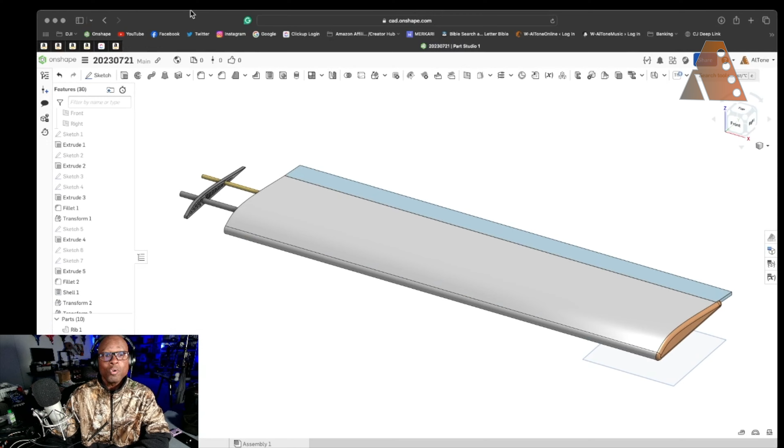So if we go over to the computer screen here and jump into Onshape, essentially I started designing this plane from the wing.

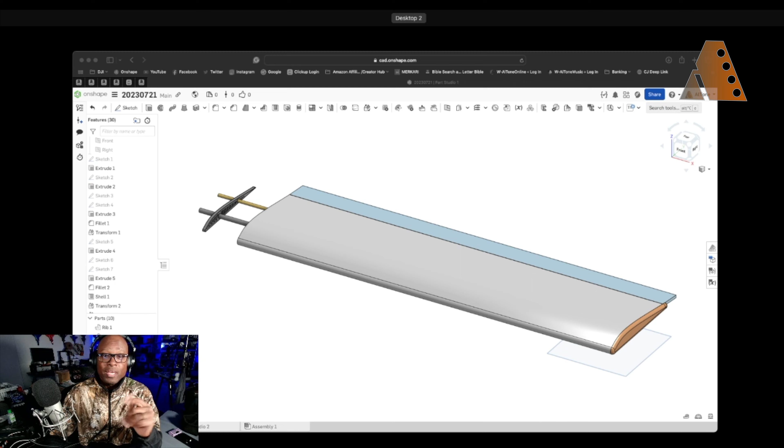The reason I started with the wing is because I have a plan that was provided to me for a trainer, the trainer I actually learned to fly on, from our club president. He designed it for the club as the club trainer, and I thought it was awesome, so I was trying to build something like it. Essentially, the wingspan on this guy is basically the same.

So this is basically what the club plane plans look like, and he had some dimensions in here for the wing. I took that information and started working on my own design for the wing, which is what you see here.

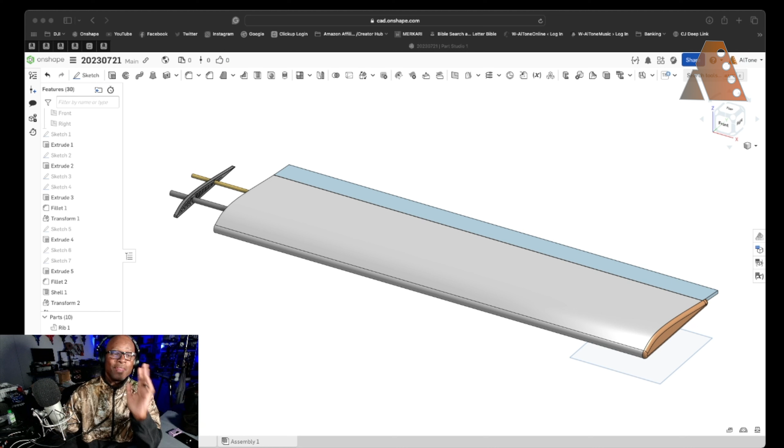Now this wing, if I take off the foam board skin, and that's what I'm doing here in Onshape, like I said, I designed it myself. These ribs I designed and 3D printed, and each one is about 5 millimeters thick. I've 3D printed a ton of these.

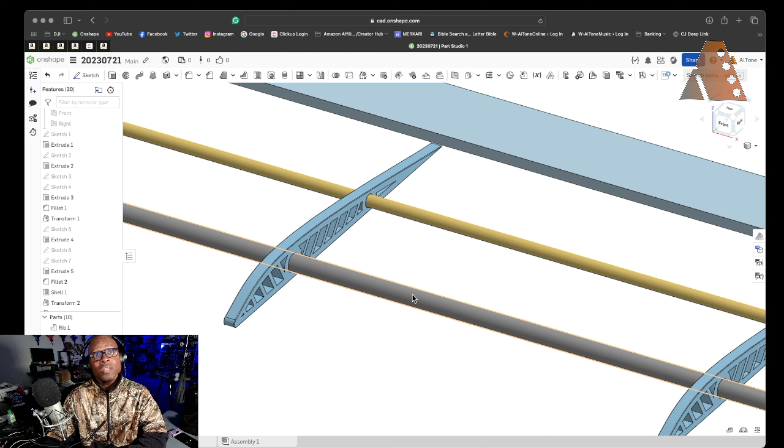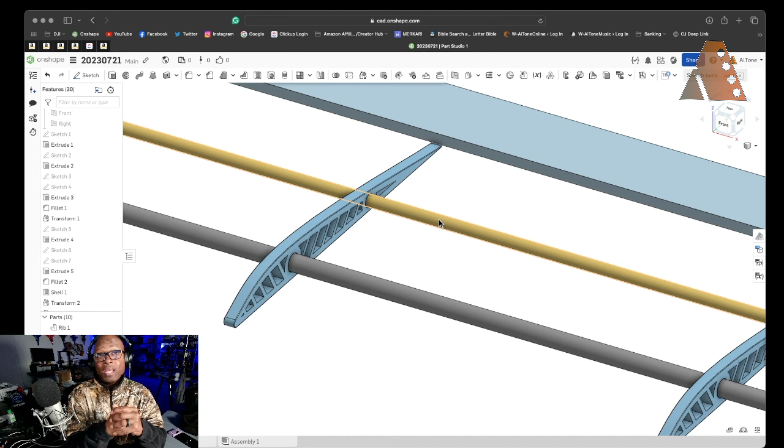And then this is the carbon fiber rod that runs through it, basically a Walmart bow and arrow rod that I chopped the ends off of. Each side of my wing is 28 inches. This is basically an extremely long craft barbecue skewer, long enough to give me over 28 inches, and I chopped the ends off of that as well, and used that to design the wing.

So my wing is actually relatively heavy. Now I made a tip that I was going to 3D print for the wing, but I actually did not do that. I just covered it with foam to save a little bit of weight, and then I took the same interior. So my wing does not have dihedral, and I extended it.

I want to say it's extended, it's probably 50 millimeters wide, and then I took out some material to make it lighter, and then that serves as a joiner. The ribs actually slide into that. So this wing is reinforced all the way down, which of course adds just a little bit of weight.

So in the process of trying to figure out how to do the fuselage and all that, I decided to go right now with a tube fuselage from the Experimental Airlines channel, and that's what my plane currently looks like.

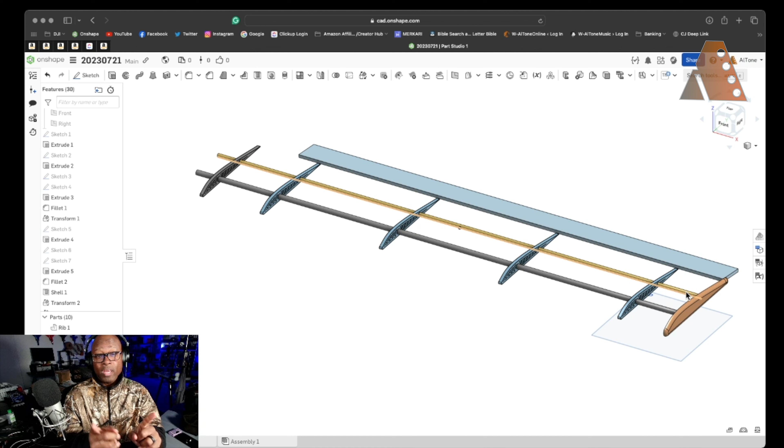I'm going to be working on it, and the tail is relatively long and whatnot. I'm going to be working on putting landing gear on it. Right now, I'm estimating this plane to be around 2,000 grams, which is a little bit over 4.5 pounds total, and that's all-up weight with the battery included, everything complete.

So that's what I'm estimating, essentially that's my budget for weight: 2,000 grams, or 4 to 4.5, a little bit over 4.5 pounds.

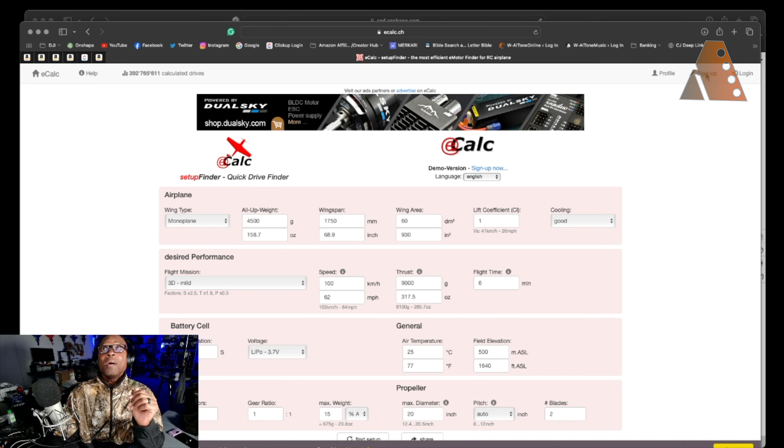And so with that information, you can use a tool like this, which is eCalc, and I actually have a membership for it. You can use it for free, but if you want, you get a few additional things and tweaks if you get the full version. But I have signed up for the subscription myself.

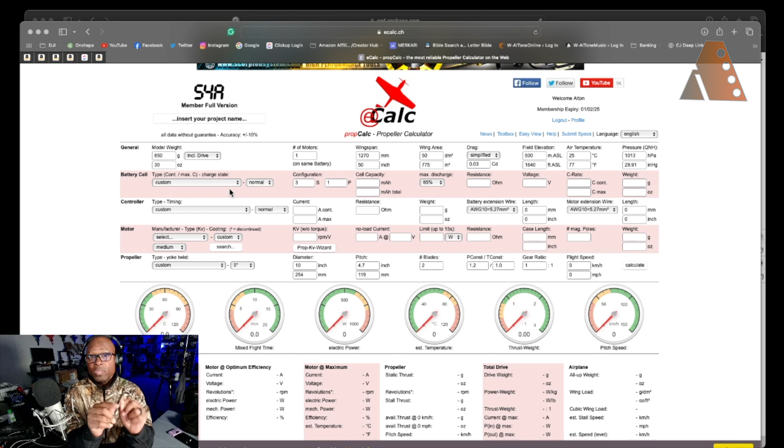This is a phenomenal tool, but it's got a lot of information in it, and I had no idea how to use that information. So I wanted to share this tool with you today. I apologize, it's taking me a little bit to get to it, but I wanted to share this with you. You can go to it yourself and check it out. I don't know who actually put this together, but it's just awesome.

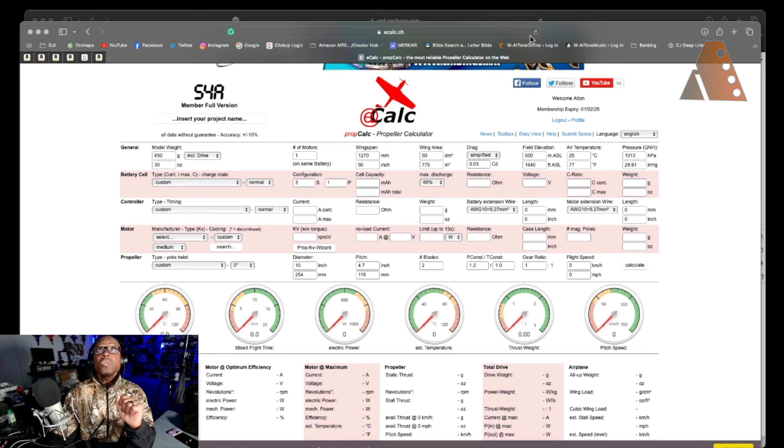It gives you so much information, and I'm going to demonstrate it a little bit for you using something that we already know, which is the FT Tutor.

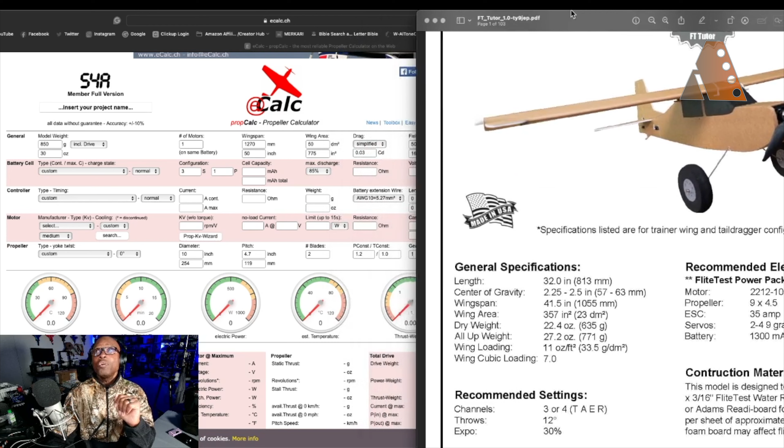So for the FT Tutor, if you get the plans, which I have, and of course I have a tutor that I fly, I thought I don't totally understand how to use eCalc to come up with the design I want. So what's the best way to figure out how to do something? Reverse engineering. That's exactly what I did. I took the general specifications, sat there looking at the plans, and realized they had much of what was necessary for me to put together a plane and fly it. They have so much of what I need, so if you want the information, it's right there.

So you've got your wingspan, wing area, and what you can do is enter the model weight, your general weight in grams. Your all-up weight is 771 grams. So if you want to figure out how this works, we're going to plug in the information real quick so you can take a look and see what it does. It actually converts the grams to ounces for you, and converts between the two.

If you know inches, put your inches in. If you know millimeters, put millimeters in. So our length, the wingspan we're looking for, is 41.5 inches. If we put 41.5 in here, it gives us 1054.1. They have 1055, so they've rounded up just a little bit.

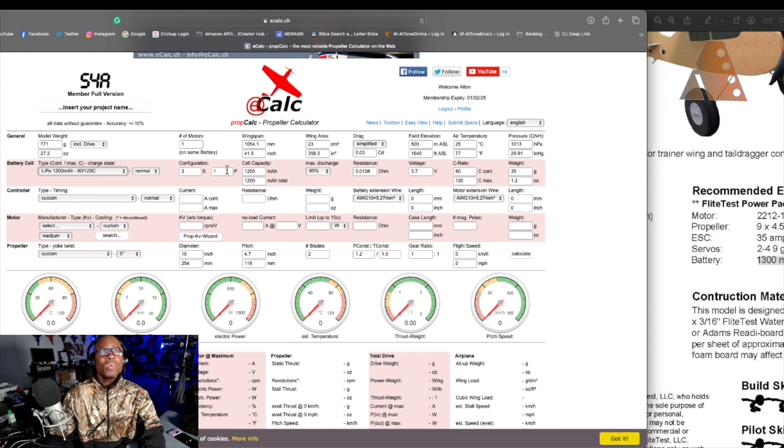So for battery, if you know what battery you're going to use - this one uses a 1300 milliamp hour 3S LiPo - we're going to put that in here. We can't find 1300, so we'll go ahead and put in 1200 milliamp hours. That's essentially close enough. A 3S battery - now that 1P, I'm not sure what that is. If you're watching and you know, let me know, because I can't think of it off the top of my head. So your cell capacity is 1200 here.

Just using this tool is going to get you in the ballpark, and then you can do some tweaking once you get there. For your controller type, our ESC on this guy has a 35 amp ESC - I'm trying to remember which one I actually have in mind. Hobbywing is one I use a lot: 30 amp continuous, 35 max, maybe 30 amp 4S. That's fine, so that's what they're actually using, a 35. So we're going to go with 40.

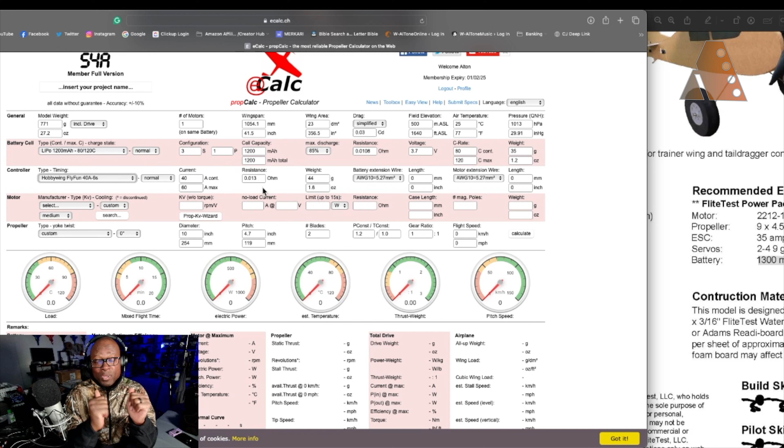So if I'm going to actually buy an ESC for this particular plane, I'm probably going to go with a 40 amp. I realized that for the plane I'm building, I have to go with a 60 amp ESC for the amount of power I'm trying to put through it and the flight time I'm trying to get out of it. I'm trying to remember what gauge the motor extension wire is - we're going to leave it the way it is. And then we'll go to motor.

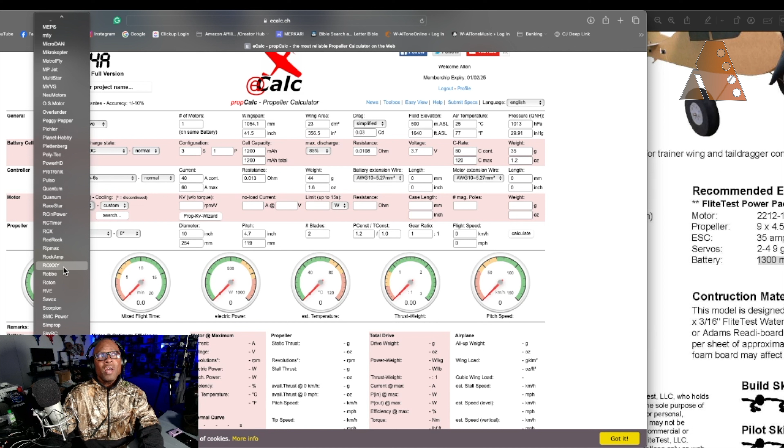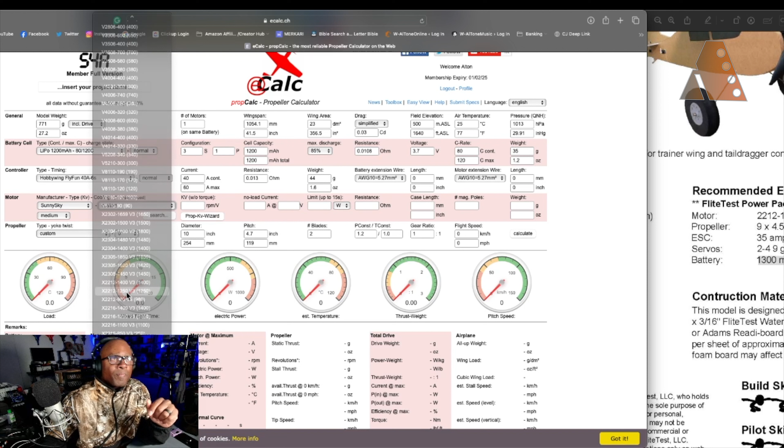Now the motor they're asking for - what I'm using is a SunnySky, which is the motor I currently have in my FT Tutor. So we're going to go with them. Let me see if I can find it; they should be in alphabetical order. Now you're not always going to be able to find every single motor type, but I'm going to go with a 1250 because I think that's going to give us a more similar result.

For prop type, I'm going to go with custom. I'll leave that degree at 0, but my diameter - what they have listed is 9 inch, and the pitch is 4.5 - 2-bladed, and that's it. So from here we can hit calculate.

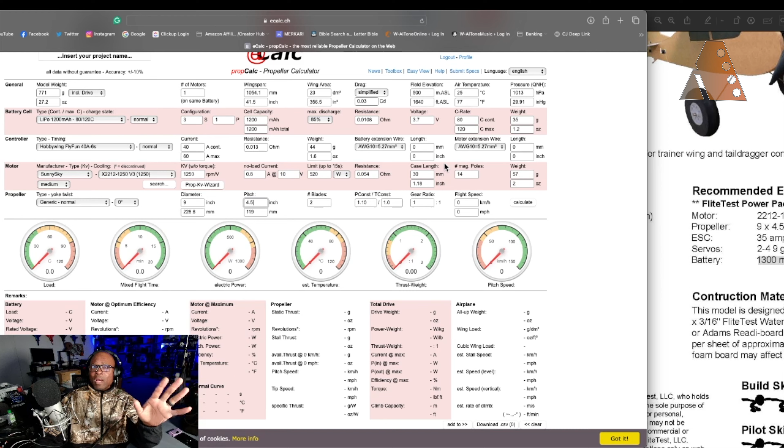Now again, I basically kind of winged it all the way through this. If you have better and more accurate values, you can use those. But if you don't, this should give you an idea of what type of electronics you want to use or purchase for your plane. If you already have the electronics, try to get as close to that value as possible, because what that may tell you is that for the size of your plane, you're either going to have to reduce the weight or purchase other electronics to fly it.

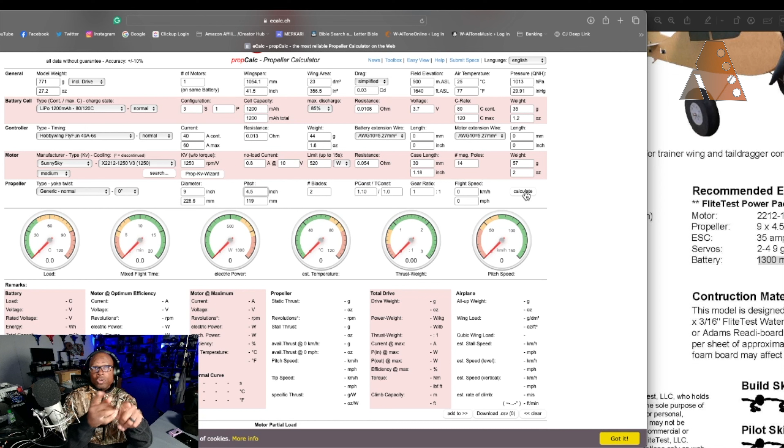So let's go ahead and hit calculate, and we should have everything in the green.

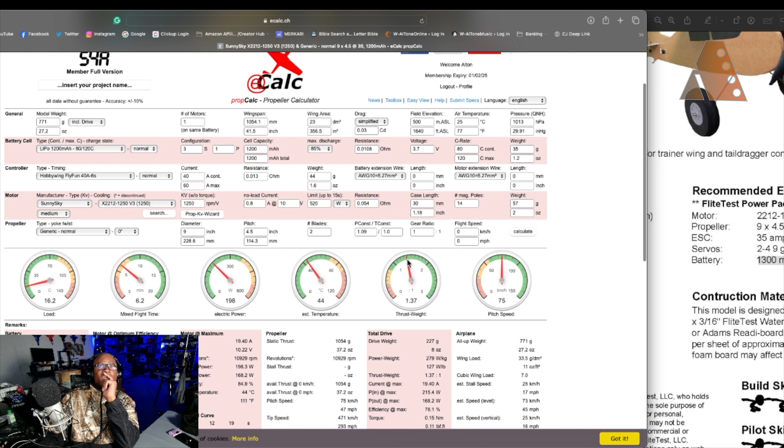So what we have here is the load and your mixed flight time, in minutes, and we're looking at just over 6 minutes of flight time, so you're probably going to be safer flying around 3. Temperature, thrust to weight ratio, so you should be in the green for this, which is good, and your pitch speed, you should be good there.

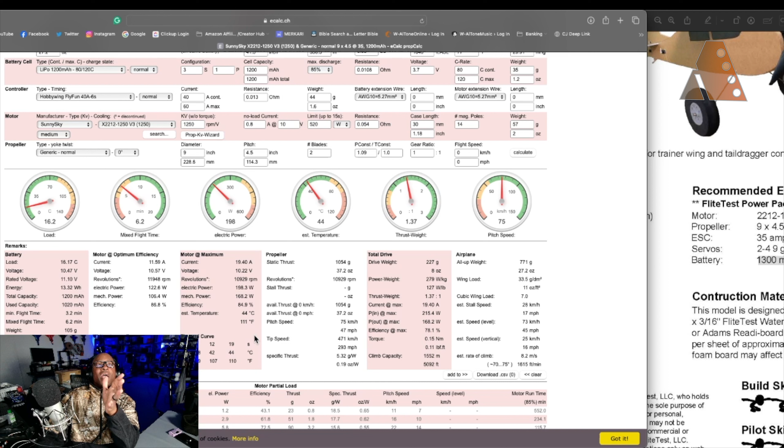And then again, it gives you a lot of additional information down here. Now, I can't tell you that I understand all of it, but if I dig into it a little bit, I'll understand quite a bit. It gives you a ton of information, and it gives you some curves down here that you can take a look at.

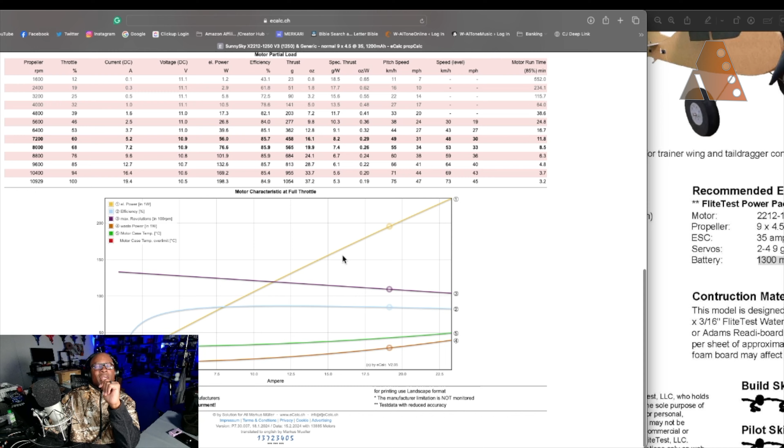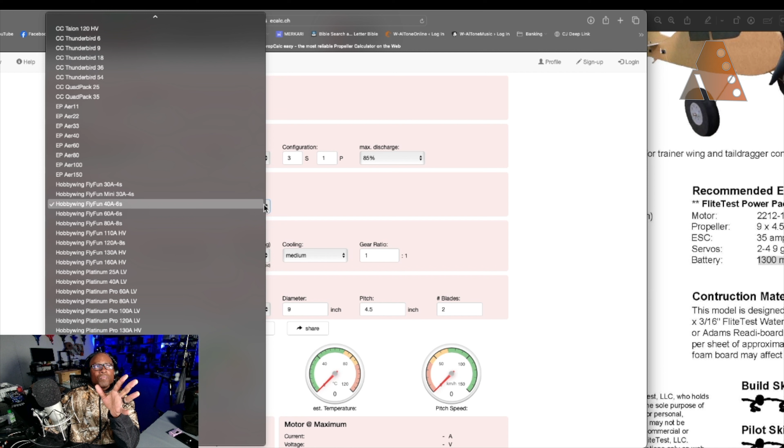Now, if you click Easy View, it comes to your propeller calculator. Field elevation, all that kind of stuff. You still have your battery, normal 3S, 85%. Hobbywing FlyFun, so you can choose your type of ESC, and then your controller or ESC is the Hobbywing FlyFun 40 amp 6S, so this ESC can handle up to 6S, essentially is what that means. Manufacturer, Sunny Sky, you got that. Medium, generic, normal, diameter, pitch, blades.

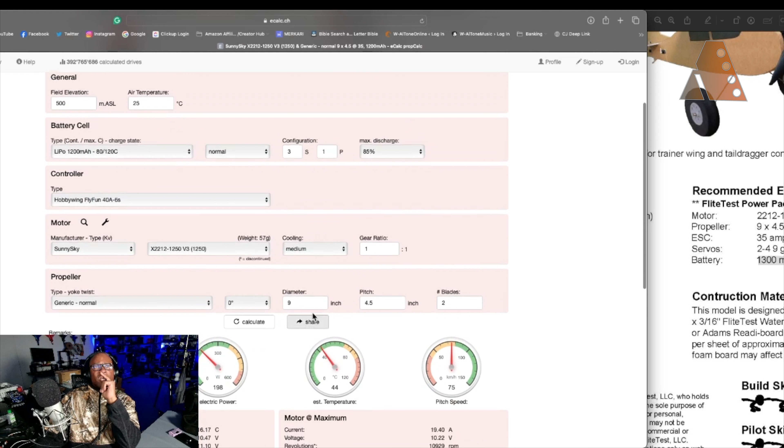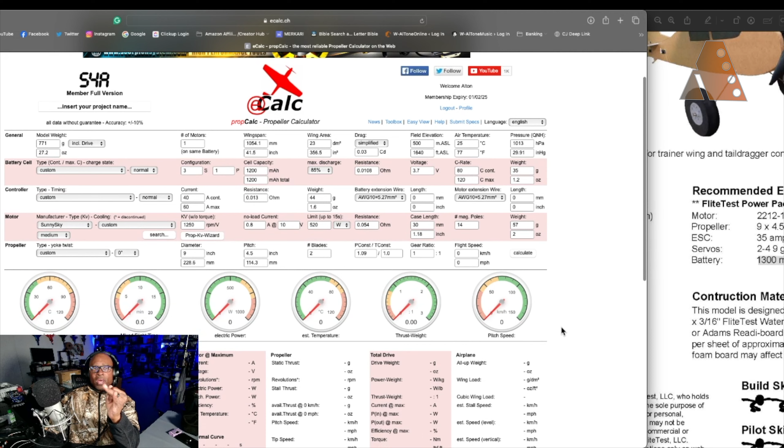And then you can hit calculate here, and it's going to give you a lot of information there as well. Your pitch speed is a little low according to this, so you may want to go in there and make some adjustments. But essentially what I've been able to do is use this to get a good feeling for how well I've actually done as far as calculating the right motor and the right ESC for the plane I'm flying, because those are the two main things you want to make sure you get right for the size of plane that you're flying, and the weight and the amount of flight time you want to get out of it.

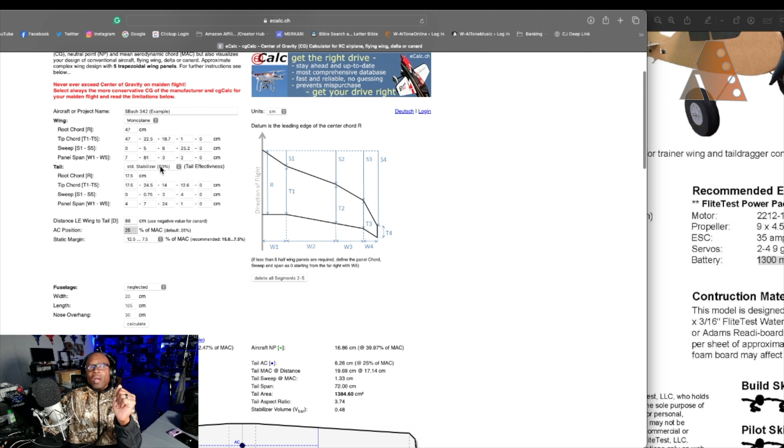Now, the other thing that I think is great about this is because it actually allows you to calculate a ton of different things. So you can put in the shape of your wing, the length of your aircraft, all of that, and be able to get your CG based on the wing type that you're using. Your wing root chord and tip chord. If you have all that information, it will tell you what your center of gravity is, and I've already been able to calculate that as well for the plane I've been working on.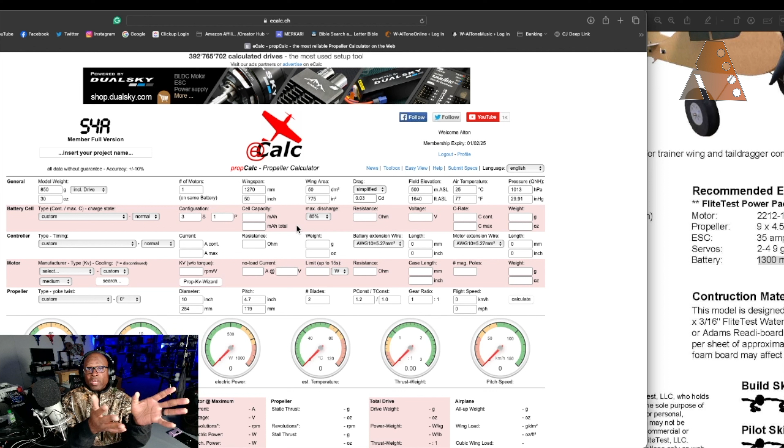So this is just a fantastic tool, and if you're working on building planes, or if you've already built some and know what size motor you've put on them, I would suggest going into this tool and using it to try to understand how these calculations come out, so that you can use that information to design and build future aircraft, knowing that you have the right size motor, the right size ESC, and your center of gravity set pretty accurately, so you're going to be able to have a successful flight, barring any unforeseen issues within the build process itself.

So I just wanted to share that with you. I hope that this helps you in some way. I think this is a fantastic tool, and I kind of wanted to go through and share it with you the way I did, because I had some trouble.

I've had this tool for a year and just could not wrap my brain around how it worked, until I came up with the idea of taking the FT Tutor from the plans and just plugging the numbers in and getting that information back. And then from there I get to see, oh, this is how this works. To me it's phenomenal, because I actually realized that I had too small of a motor and ESC for the plane that I'm building. So now I have a new motor and ESC, I'm gonna swap those out.

And I'm also going to try to see what I can do to lighten the plane up just a little bit, but I know I need to stay under 2,000 grams for it, and it should be able to fly, and should be able to fly pretty stably.